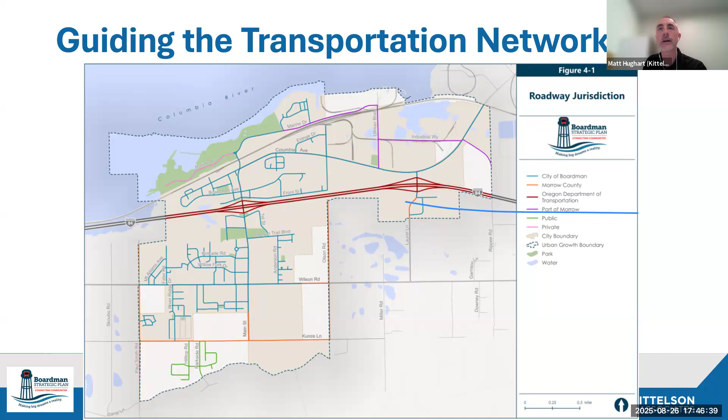The next map is a colorful map here, but it's what we call the roadway functional classification system. If you look at any transportation plan developed in the state of Oregon, almost every TSP has this map that shows how the roadway network is classified. The classification that we're focusing on here for the city is broken down into really 5 substantive classifications. You've got the freeway classification, which obviously includes and is limited to I-84 and the I-84 on and off ramps.

But then when you drill down into the city level, you have what we call arterials, which are the highest order roadways in the city. They provide the greatest degree of, not access, greatest degree of mobility through the city. And so, shown in this map, it's limited to the obvious routes through town, such as Main Street, Columbia Avenue, Wilson Road, and Kunze Lane. Those are all recognized as not only high importance local, but regional travel routes within and through the city. So they got the arterial designation.

And one way to read this map is you'll see solid lines represent existing roads, and the dashed orange lines represent intended or proposed or planned roadway extensions. And then this map identifies the classification that would be given to that extension. So a solid orange line is an existing classified arterial road. A dashed orange line represents a planned extension of an existing road or a new road. And the classification according to the color is how it would be classified after it's built.

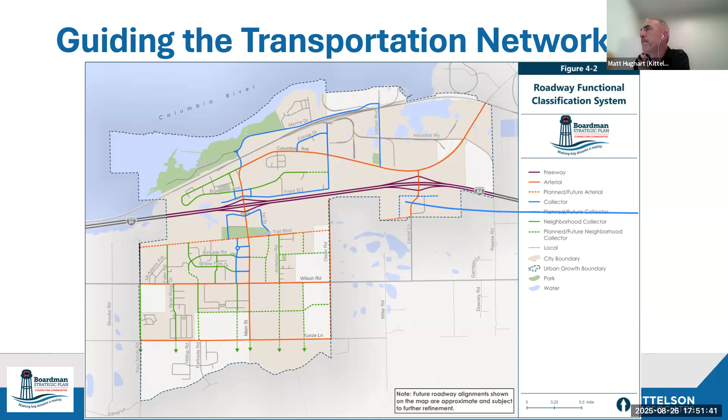Any other questions on this map? Okay, I'll move on. The next map is just a recognition that we have some industries in town that generate a lot of freight traffic. And there's a recognition that those industries need to rely upon the city's roadway network for part of the ability to serve that use.

And then we also recognize there are local freight routes. So local freight routes would be businesses within the city of Boardman that are generating deliveries, but probably not generating major freight traffic on an hourly or daily basis. It's just the occasional local project or local truck deliveries for delivering goods and services to businesses.

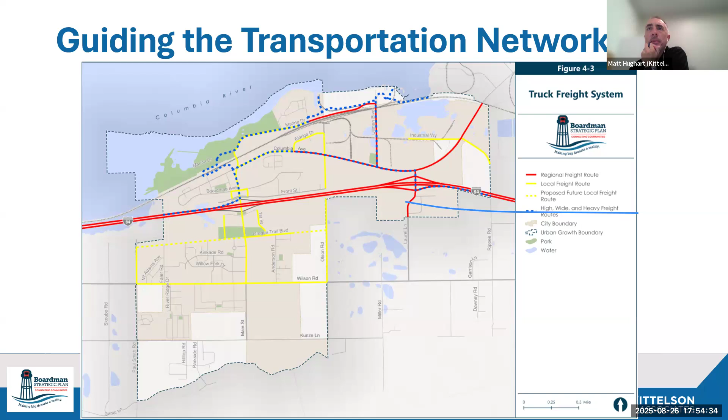So beyond these three maps here, the rest of these maps that we'll show here are the actual project maps. And within the packet that you received, all these maps have a table. The way to interpret these maps, if you haven't figured that out yet, is that the dashed lines you see on this map represent new roads or new intersection projects. If they're dashed, that means they don't exist today, and we are planning for their eventual construction or development

at some point, whether that construction or development occurs as part of a city capital-led project or as a condition on private development. The numbers on the map correspond to the description in the table. So project R1, for example, would be the extension of Boardman Avenue at its present terminus all the way over to Olson Road, and so on for all the other projects. So those projects are identified in tabular form. They're also identified in map form.

I don't know if we want to go through each and every one of these projects, probably not, but I'll point out a few that came up over the course of this project. You'll notice a big green square over the I-84 Main Street interchange. And you'll also notice some more specific intersection-based notations at some of the intersections, including the I-84 ramp terminals and the intersections at Main Street and Boardman Avenue.

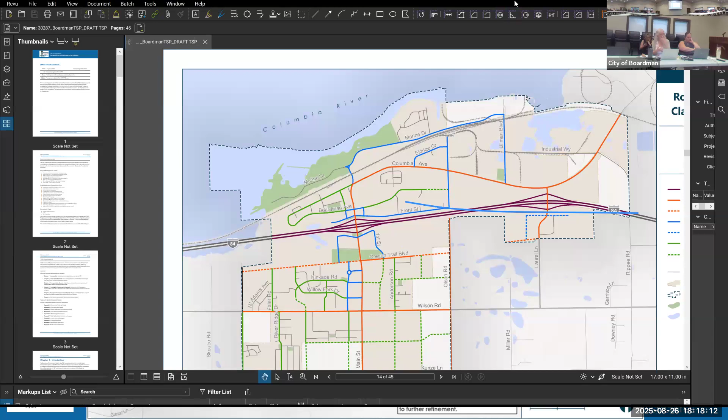I know they were seeking a firm to master plan their property. We haven't had any recent conversations with them, hope to circle back in the near term and figure out what they're thinking and where they're going. But I think they're very cognizant that the community wants to have a town center. The work that we're also doing to update our comprehensive plan and development code, we're in the middle of some community input gathering right now, and that process is helping us.

The question that's being asked is, where is the heart of Boardman? And in no uncertain terms, the community is focusing on that stretch of property from City Hall to the other side of Main Street, looking at City Center Circle as being that location where the heart of Boardman can happen. So on the west side, it's the government and services area. We've got City Hall, the senior center, community counseling services, and then along Main, we have the grocery store and the bank, and I'm gonna miss somebody, Napa. We've got a couple other retail operations.

What's exciting is what might happen on the other side of the street. Because of where the power lines are, we do know that the hospital was initially looking to site the medical facility as far north as possible. They moderated that because of the high voltage power lines and their desire to have Life Flight. So we're hoping that they're looking at more of the center of the property, and if that plays out, then it really does give us the opportunity to work with them to extend City Center Circle and create that opportunity for the heart of Boardman, as our comp plan consultants are calling it.

So that's our vision, Commissioner Finch. Hopefully that answers your question. Again, as with most communities, in some respects, we're a little reliant on what a developer may choose to do or not do. But we do think that they are invested in Boardman. They made a choice to come here. We've got a sense that they are invested and want to become truly a member of the community. And I think from that perspective, they'll work with us.

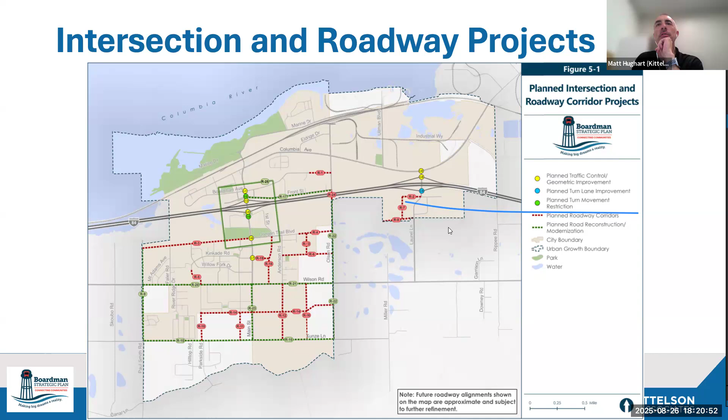Yep. Well, we can come back to this figure if need be. Let me maybe just move on to a few other figures. It might spur some conversations as we get into the different modes. So this map is just on intersection and roadways, but as I mentioned earlier, we also expand that planning effort to identify what's shown on this map, what we call the local street connectivity plan. Now, not every TSP has a plan like this, but because Boardman has so much infill and new development potential, more so than a lot of other cities in the state, it makes sense to create a map like this.

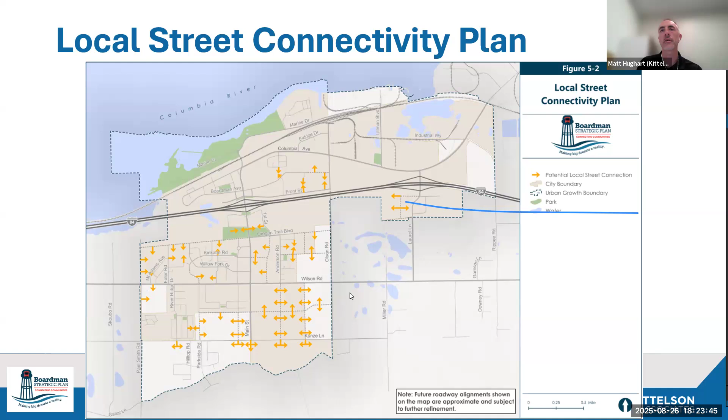So the more grid type of network we can provide, the better off the city will be in terms of a long-term connected neighborhood network. So this is just a map that recognizes what we expect or want to see local development adhere to when it comes to access and local streets within undeveloped parcels.

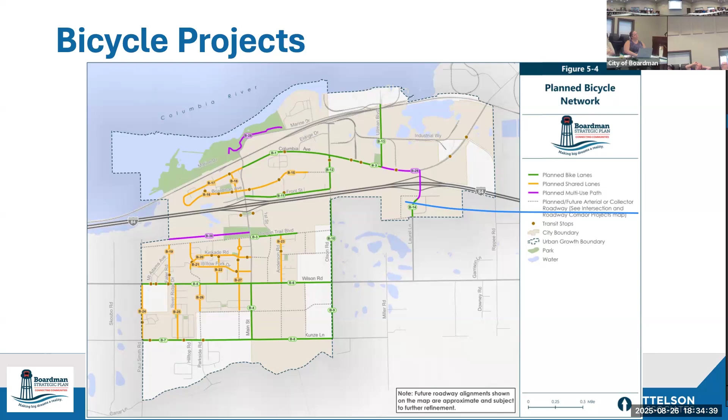And Matt, this is Brandon, I don't see any marks on the walking to the marina. So there's no walking path right now currently to get... oh, good, I see that over the bridge. And then there's no walking path really to the west from there, along the road. Are you talking about this section of Columbia? Not on Columbia, what's the road? Marina Drive. From Columbia, over and then to the west there. Yep, on Marina Drive, there's no path. Yeah, great question.

This is one of those areas where the planning process can only take you so far. A lot of that section of Marina Drive is not owned by the city. It's actually a private road owned by the Army Corps of Engineers. And while they do have some pathways and some goat trail connections through there, we're not planning for roads that the city has no control over.

That's not to say that we couldn't, and if the desire is to extend some lines on those maps to recognize that potential, it's not a deal killer to add them. If you think they're appropriate to add, then we certainly can. It's just not a road that the city has any authority or control over, so we'd be at the mercy of the Army Corps of Engineers to help establish and realize projects along those lines.

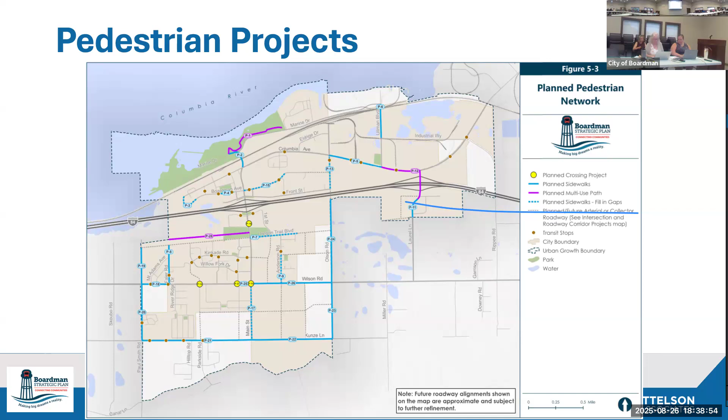So he may have a battery problem and we don't have another port to plug in. So Matt, I'm just gonna push a little bit. We're down to 5%. We're trying to figure out how we might be able to shift a little bit here and figure this out. Lightning round, okay. I think I'm more or less done, I've got some extra maps in here, I won't pause on these. I'll give Shayna a minute or less to hit through some of the things she's been working on related to development code and implementing ordinances, so take it away, Shayna, I'll advance the slides for you.

Okay, can everyone hear me? Yes. I'm Shayna and I can explain our company acronym later. But basically we were brought on, as Matt said, to draft development code to implement this TSP. Again, purpose statements here. We were looking to align with the state's transportation planning rule, or the TPR, but most importantly, implement the updated TSP. We'll just move on to the next slide.

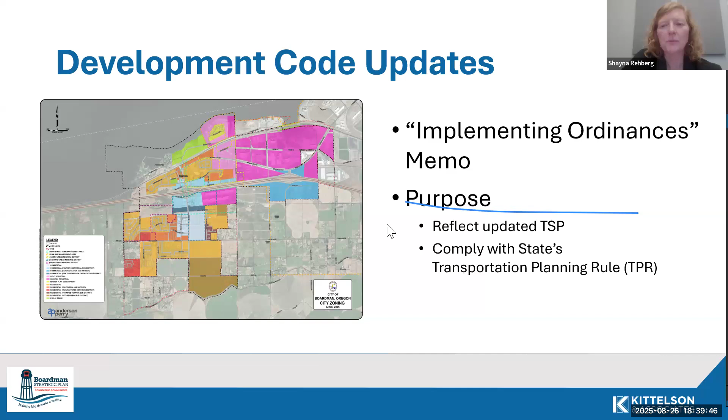A few themes that I can actually speak to on the following slide, in evaluating the city's existing development code and what would be needed. And I will say very plainly that in a way, not much is needed. But what we did find and what we did propose is in your packet for tonight. It's called the Draft Implementing Ordinances Memo, and there is draft code language in there in attachment A.

So in these three theme areas, we found for TSP consistency that code updates we're proposing will align the code with block spacing, road design, and traffic impact study standards developed during the TSP update process. And regarding walking and transit supportive development, minor changes are proposed to existing pedestrian access and circulation standards. It's also proposed that transit and rideshare uses be permitted in parking lots, so long as those parking lots can still provide minimum parking, and that coordination of transit stop improvements with the transit service provider can be required when development occurs adjacent to existing or planned transit stops.

Say, Shayna, I think we're just talking to the online group now. Oh, I think we lost it. We lost the entire... I was trying to speed too. You're back, we're just not fully connected. Can you hear me? We can. Okay, I don't know what you last heard. Can you tell me what you last heard, Carla? I think you heard most of it. Okay, well, excuse me for going so fast.

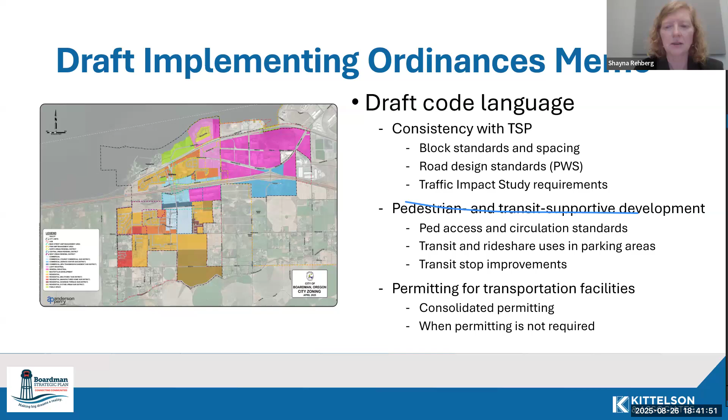I don't know if this is going to make any sense, but as far as the three themes, the third theme being transportation facility permitting, where changes we're proposing clarify when transportation facility permitting can be combined with other permitting, as well as when permitting is not required for transportation facilities.

That was maybe just a little fast, but point being, the memo itself and the proposed code language to date is in that packet you got tonight, so that after any comments from this group tonight, or I imagine we'll allow you some time after tonight to comment, MIG, the company I'm with, and the project management team together will update the proposed code language to be what we'll call an adoption version of the code updates, and that'll go into the public hearing process alongside the updated TSP itself. Following the hearings, MIG will prepare a final version of the code updates. So there you go. Are there any questions or comments? That was pretty fast.

I think what I would add is that the memorandum that was provided for this evening that was drafted for us. As old as both the development code and the TSP is, I was surprised at how much of our code is still okay. So there's clearly some things that have happened over the last several years that have changed some of those development code implementation requirements under the transportation planning rule.